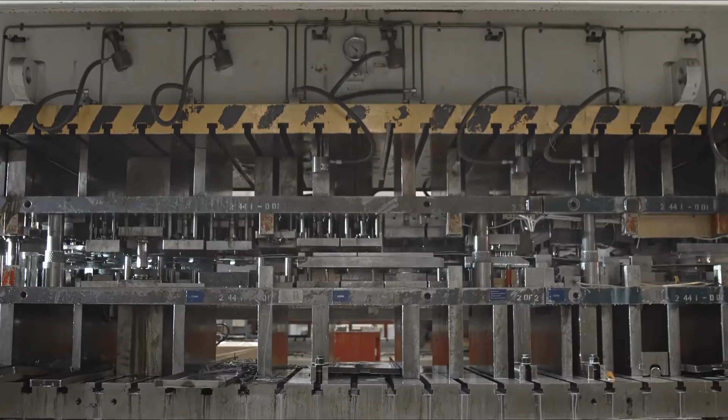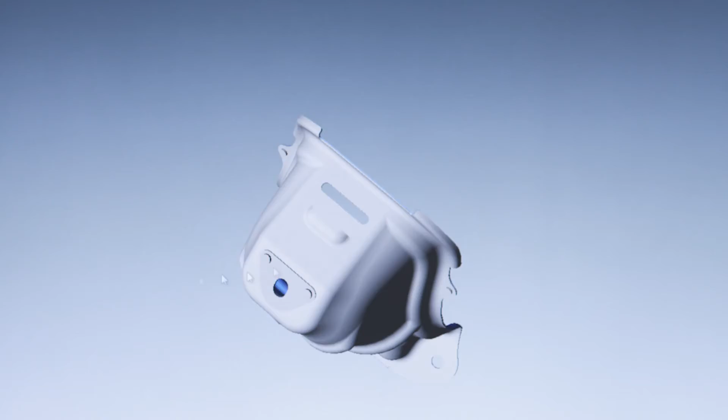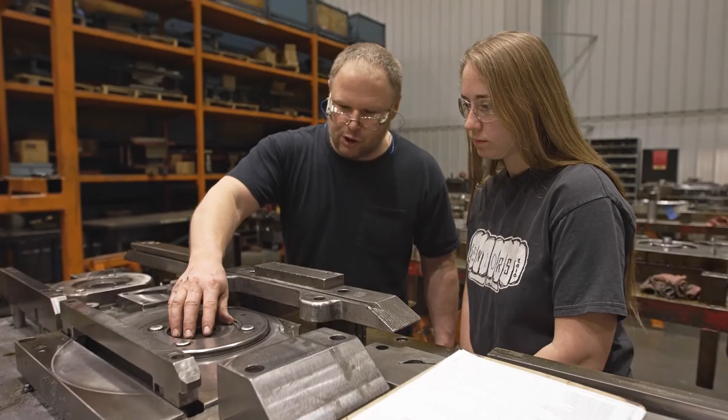For nearly 75 years, the Precision Metal Forming Association and its members have subscribed to the very highest standards of excellence. PMA's annual Awards of Excellence competition recognizes innovative metal forming companies for outstanding performance in design, product development, process control, productivity, innovation and technology, quality, safety, and training and education. Some have achieved the pinnacle of distinction, and we honor them now: the 2016 Awards of Excellence in Metal Forming winners.

Our first award is the metal forming industry's most prestigious honor for design and engineering excellence, the Higgins-Caditz Design Award. The award is presented to a manufacturing company that has demonstrated innovation, expertise, and unique product design. It was created in 1955 by the Worcester Pressed Steel Company of Worcester, Massachusetts, in memory of its founder, John Woodman Higgins, and former PMA chairman Carter C. Higgins. The award is sponsored by the Quarterly Club, a group of CEOs from leading metal forming companies, in memory of Quarterly Club founder and past PMA chairman Clem Caditz.

The 2016 winner of the Higgins-Caditz Design Award is Federal Tool and Engineering, West Bend, Wisconsin. Federal Tool and Engineering won the award for its redesign of the CB mounting bracket, used in securing heating cables to the exterior of commercial food service ovens.

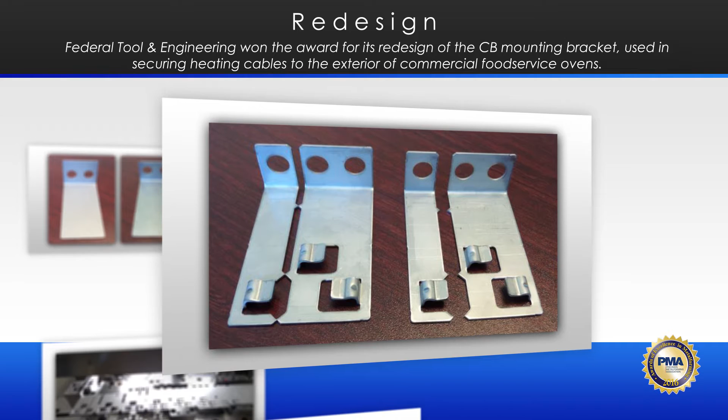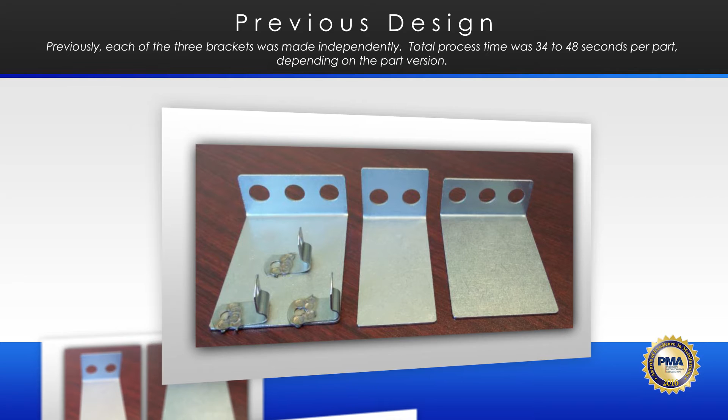Based on the size of the oven, either a single, double, or triple hole version of the mounting bracket is used to secure the heating cables. Previously, each of the 3 brackets was made independently. Total process time was 34 to 48 seconds per part, depending on the part version. This equated to a typical 2,000-piece run taking as long as 26 hours to process. On an annual volume of 45,000 pieces, the annual process time exceeded 550 hours. Additional concerns surrounded the storage, management, and procurement of 3 different product numbers, in addition to the tabs welded to each bracket.

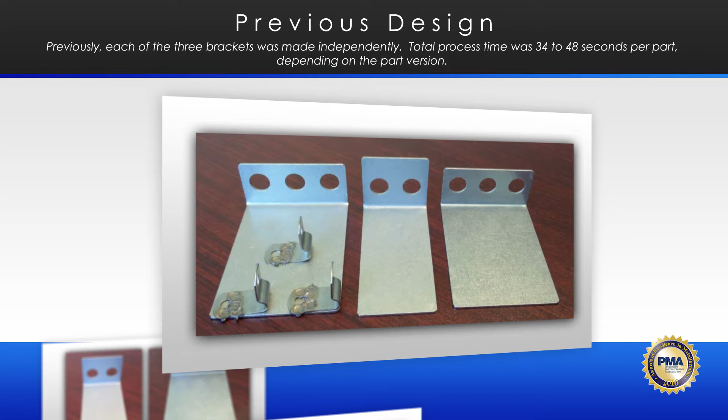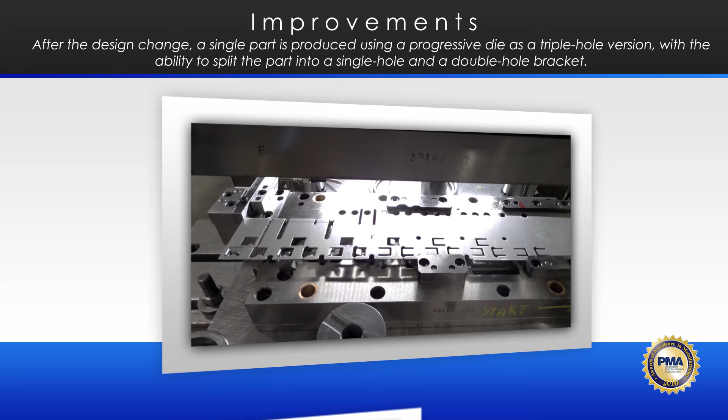After the design change, a single part is produced using a progressive die as a triple hole version, with the ability to split the part into a single hole and a double hole bracket. Total process time has been reduced to 5 to 6 seconds, depending on whether the triple hole version is split into a single or double hole. This equates to a typical 2,000-piece run taking about 4 hours to produce, resulting in an annual reduction in processing time of 460 hours. The original part was produced as a separate job with 2 work centers, 1 laser and 1 brake.

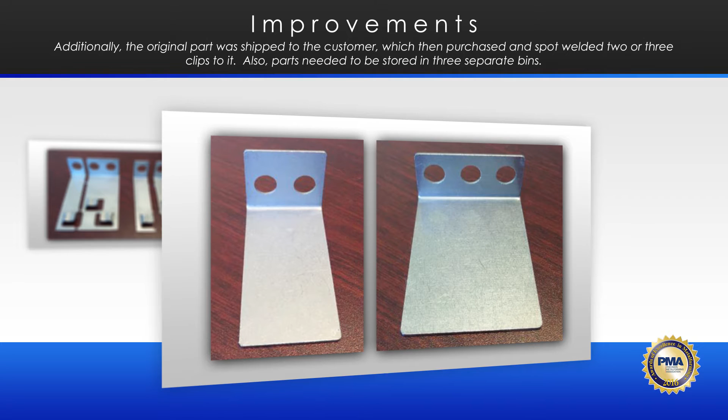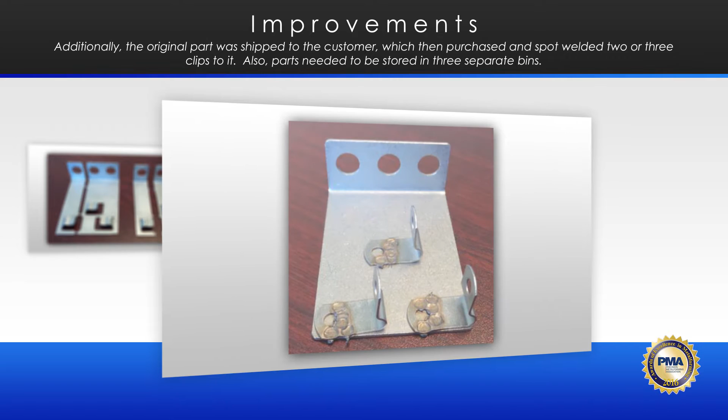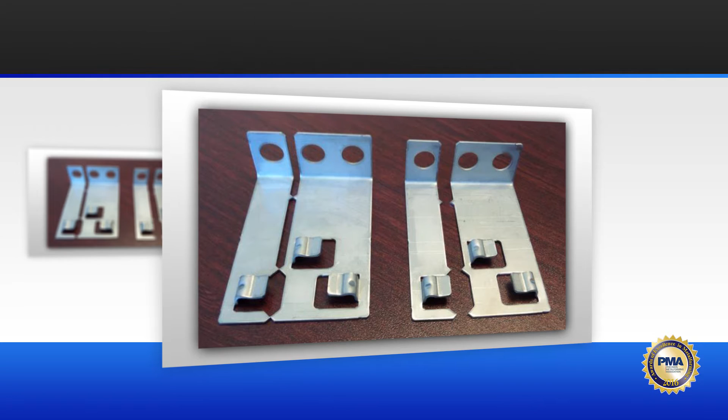With the new design, 3 press and post-press operations are eliminated. Additionally, the original part was shipped to the customer, which then purchased and spot welded 2 or 3 clips to it. Also, parts needed to be stored in 3 separate bins. Now, the customer is shipped 1 complete part that requires no further operations, and it can be stored as a single part number until separation is necessary. Congratulations, Federal Tool and Engineering, for your outstanding achievement.

The Pitcher Insurance Agency Safety Award, sponsored by Pitcher Insurance Agency, Palatine, Illinois, recognizes an effective and comprehensive safety program or a specific innovative idea in the context of an effective safety program. The 2016 winner of the Pitcher Insurance Agency Safety Award is E&E Manufacturing Company, Plymouth, Michigan.

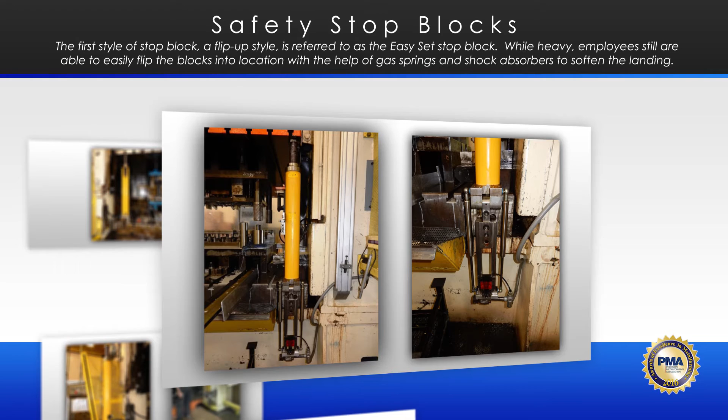E&E won the award for developing 2 types of safety stop blocks designed to eliminate the need to lift heavy stop blocks into the press, which can be hazardous. The first style of stop block, a flip-up style, is referred to as the Easy Set stop block. While heavy, employees still are able to easily flip the blocks into location with the help of gas springs and shock absorbers to soften the landing.

E&E also utilizes two safety switches on these blocks. These are automatically disengaged when the block is in the upright position. The Easy Set is equipped with Air Assist on the adjustable screw portion of the stop block.

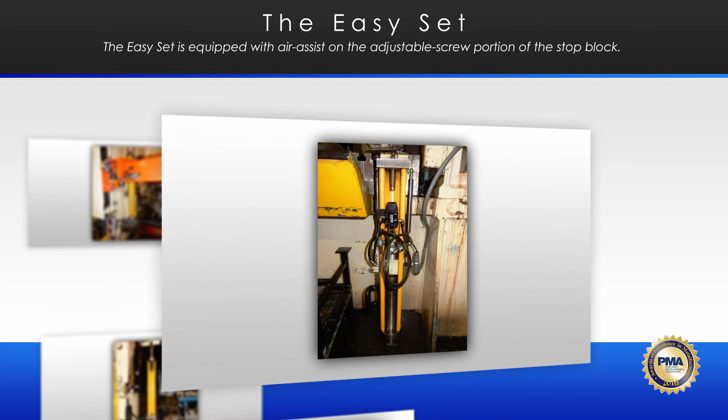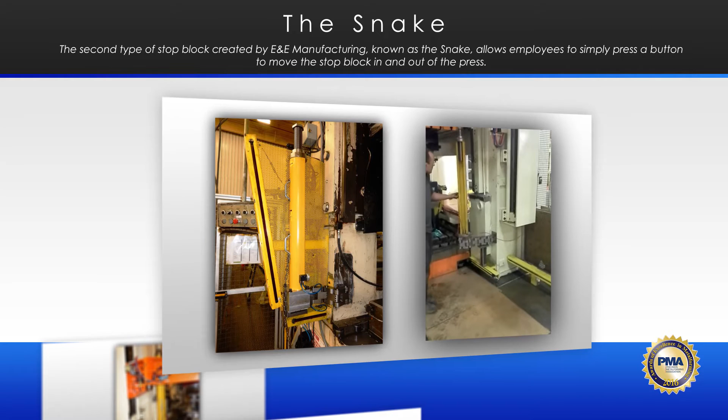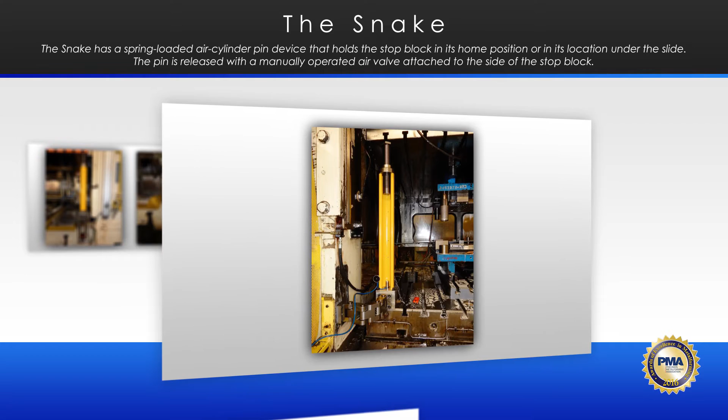The second type of stop block created by E&E Manufacturing, known as the Snake, allows employees to simply press a button to move the stop block in and out of the press. The Snake has a spring-loaded air cylinder pin device that holds the stop block in its home position or in its location under the slide. The pin is released with a manually operated air valve attached to the side of the stop block.

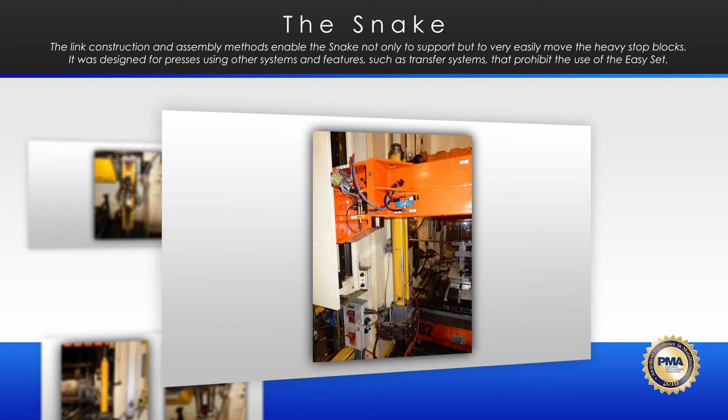The link construction and assembly methods enable the Snake not only to support, but to very easily move the heavy stop blocks. It was designed for presses using other systems and features, such as transfer systems, that prohibit the use of the Easy Set. Congratulations, E&E, on your outstanding safety efforts.

Our next award, the Zurich Manufacturing Corporation Productivity Award, is sponsored by Zurich Manufacturing Corporation, Mount Kisco, New York. It recognizes outstanding achievement in the development and implementation of programs and processes, and the use of assets that lead to significant improvements in productivity. The winner of the 2016 Zurich Manufacturing Corporation Productivity Award is Tella Tool and Manufacturing Company, Lombard, Illinois.

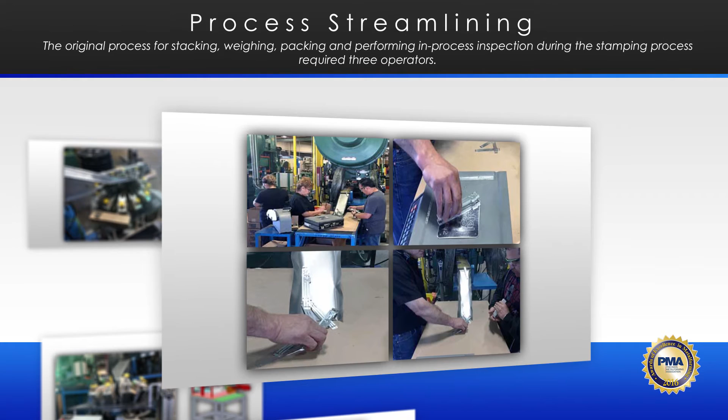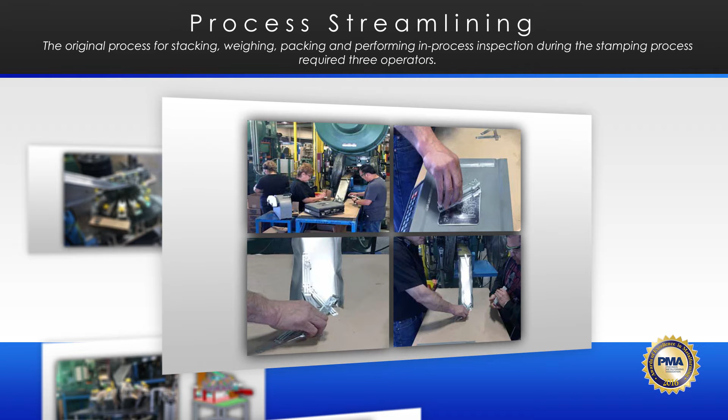The company won the award for streamlining the packaging process on one of its high-volume production tools that produces more than 3 million parts per year. The original process for stacking, weighing, packing, and performing in-process inspection during the stamping process required 3 operators. With the press running at 37 strokes per minute, parts would become tangled and twisted while sliding down the exit chute after exiting the production tool, leading to numerous press stoppages and significant downtime.

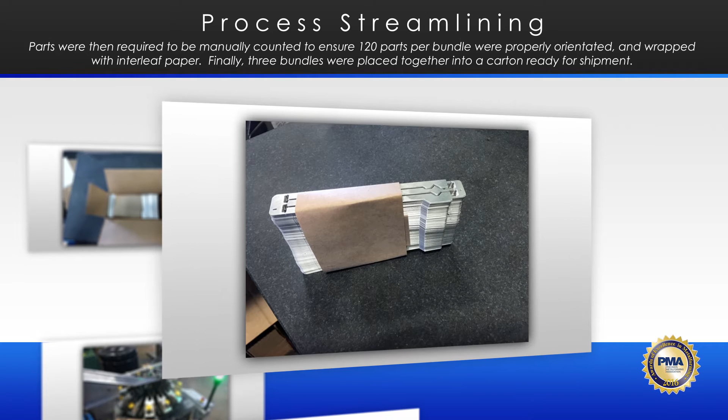Parts were then required to be manually counted to ensure 120 parts per bundle were properly orientated and wrapped with interleaf paper. Finally, 3 bundles were placed together in a carton ready for shipment.

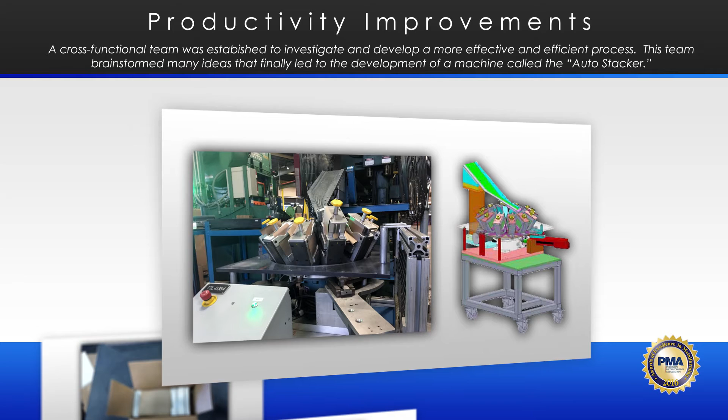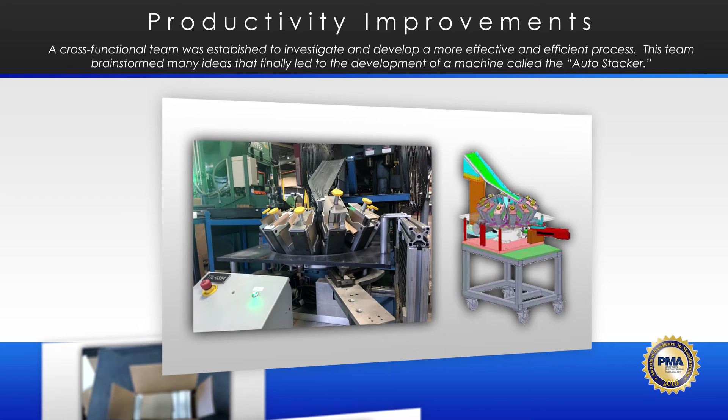A cross-functional team was established to investigate and develop a more effective and efficient process. This team brainstormed many ideas that finally led to the development of a machine called the Auto Stacker. This automated piece of equipment orientates, stacks, and counts parts as they exit the production tooling and travel down the conveyor. The Auto Stacker was completely designed and fabricated in-house by Tella Tool.

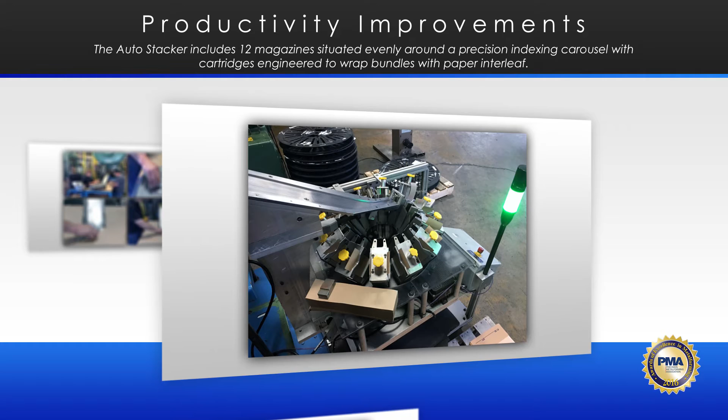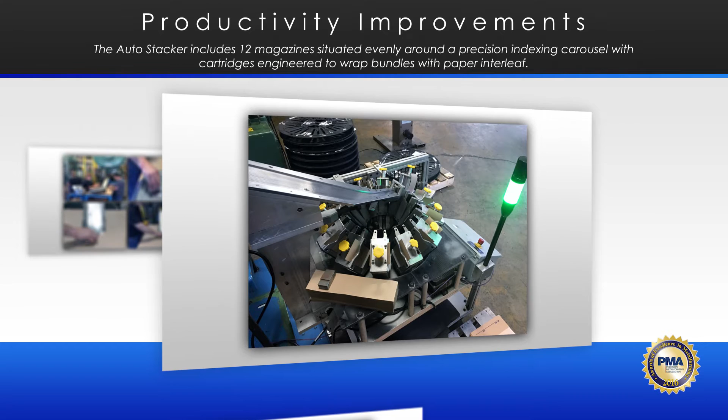The Auto Stacker includes 12 magazines situated evenly around a precision indexing carousel with cartridges engineered to wrap bundles with paper interleaf. PLCs and electronic sensors control automated indexing of magazines, timing of the servo motor, and the number of parts needed per bundle. This new process allows for a single operator to complete the entire stamping and packaging operation while effectively performing in-process inspection.

All of this while not having to stop the press. It completely eliminates the need to manually stack, weigh, and count the parts coming off of the press.

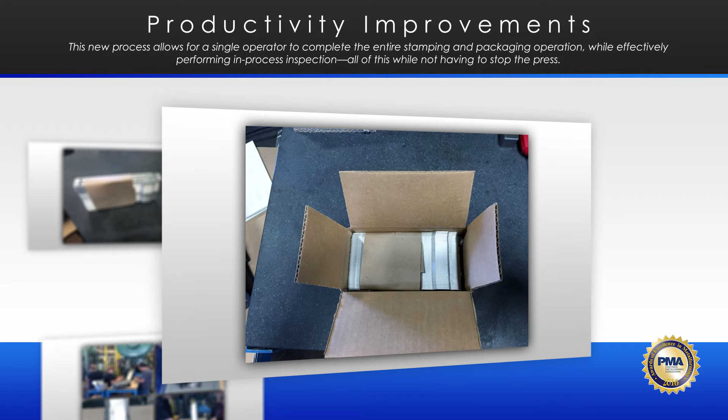With the development and implementation of the Auto Stacker, Tella Tool has achieved many productivity improvements. Press speed was increased by 48%, resulting in an additional 624 available press hours per year. Also, 2 operators were redeployed to other areas within Tella Tool.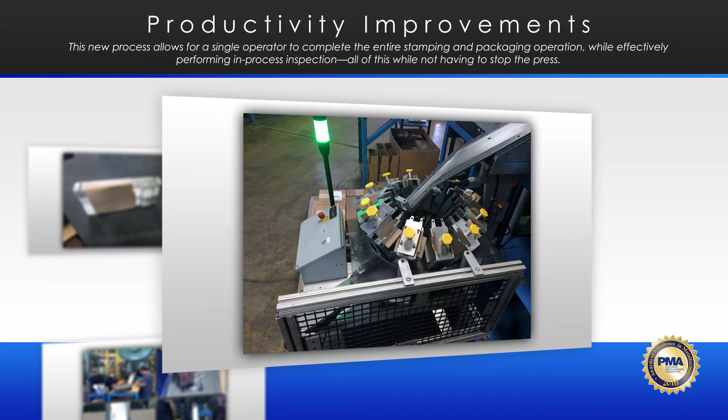As a result of the increased efficiencies and labor redeployment, a total savings of approximately $114,000 per year was realized. Congratulations, Tella Tool and Manufacturing, on your remarkable achievement.

The Ulbrich Award for Competitive Excellence in Product Development is sponsored by Ulbrich Stainless Steels and Special Metals, North Haven, Connecticut. The award recognizes a metal forming company that develops and manufactures a product that best utilizes metal in place of a competitive material, or that develops a product using flat-rolled material at a significant cost reduction to customers on a product that was previously manufactured using more costly manufacturing processes such as machining, tubing, metal injection molding, or casting.

The winner of the 2016 Ulbrich Award for Competitive Excellence in Product Development is Pentaflex, Springfield, Ohio. Pentaflex won the award for developing and processing a stamped brake spider for use in Class 8 trucks.

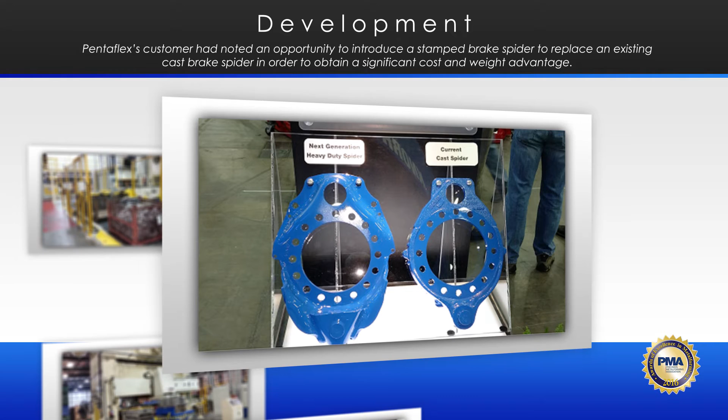Pentaflex's customer had noted an opportunity to introduce a stamped brake spider to replace an existing cast brake spider in order to obtain a significant cost and weight advantage. Because the braking loads seen in this particular application are in excess of 26,000 pounds, brake spiders routinely have been manufactured as castings. Pentaflex was integrally involved in supporting the development effort via its manufacturing capabilities in forming, welding, machining, and assembling.

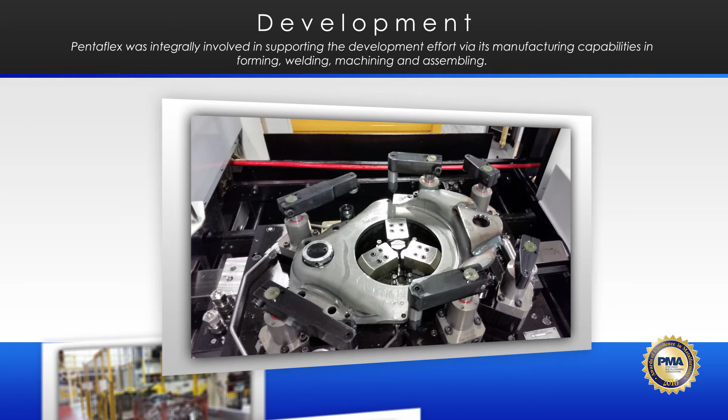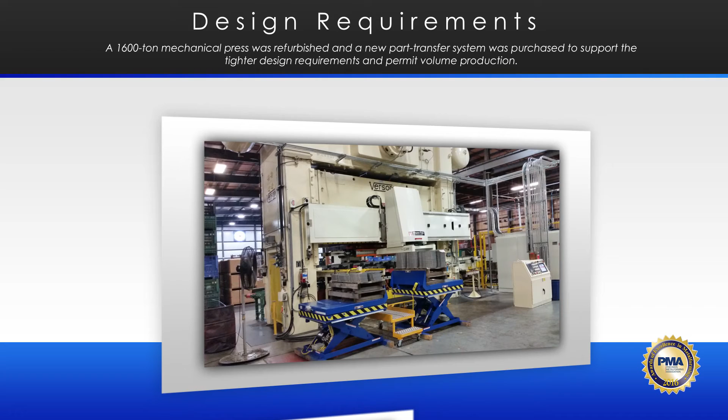As developed, the stamped, high-strength, low-alloy steel spider delivered improved stiffness, strength, and durability while being more difficult to form. A 1,600-ton mechanical press was refurbished, and a new part transfer system was purchased to support the tighter design requirements and permit volume production.

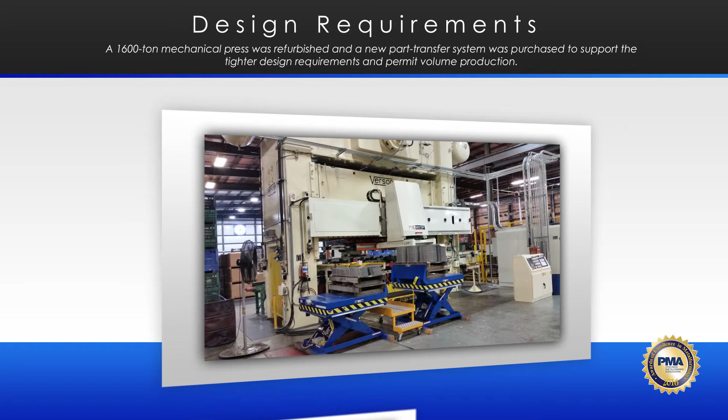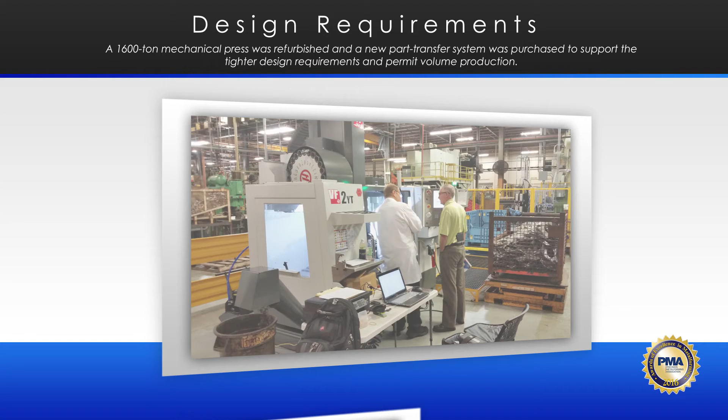Additionally, the assembly process required new gas metal arc welding equipment for welding the strap to the spider form, and the design specifications for reduced machine tolerances required a new CNC machine. A second existing press was then tooled for stamping the wheel attachment hole pattern into the spider.

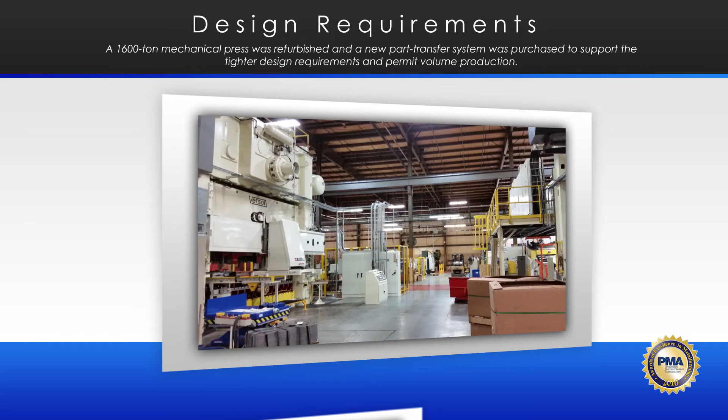From release of the first prototypes to the program's launch in the summer of 2015, Pentaflex has undertaken a continuous product development effort. Production to date has totaled more than 100,000 spiders and now includes more than 80 spider variations for different OEM customers.

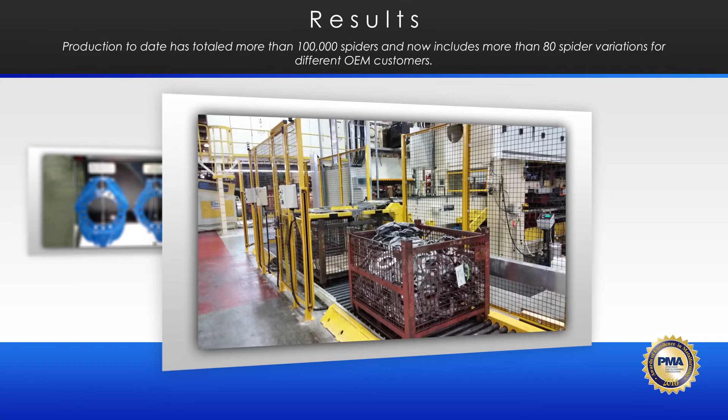The cost and weight savings achieved with the development of the stamped spider over the cast spider were significant. Cost savings total nearly $2 per part depending on the spider, and the final stamped spider assembly and production results in weight savings of 3 to 6 pounds per vehicle based on customer analysis. Congratulations, Pentaflex, on a job well done.

Our next award, the Plex Systems Innovation and Technology Award, is sponsored by Plex Systems, Troy, Michigan. New in 2016, this award recognizes a metal forming company that has implemented cloud technology to drive innovation from a product or business perspective, or transform business operations.

The winner of the 2016 Plex Systems Innovation and Technology Award is HK Metalcraft, Lodi, New Jersey. HK Metalcraft won the award for implementing cloud technology that improved company-wide information sharing and internal communications, gained more information through data with built-in quality checks and live statistical process control, or SPC, and improved operations with more accurate process controls.

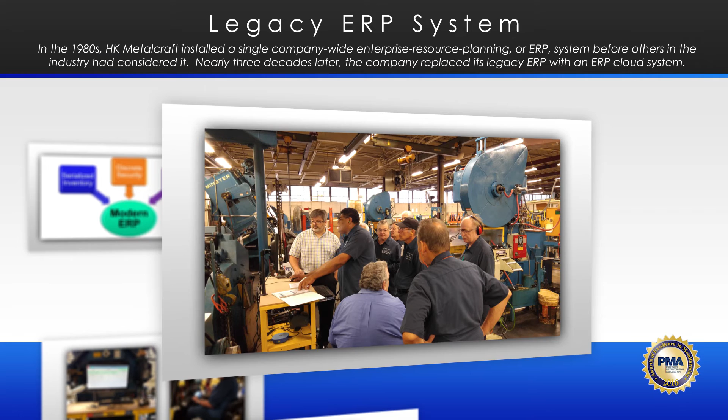In the 1980s, HK Metalcraft installed a single company-wide Enterprise Resource Planning, or ERP, system before others in the industry had considered it. Nearly 3 decades later, the company replaced its legacy ERP with an ERP Cloud System.

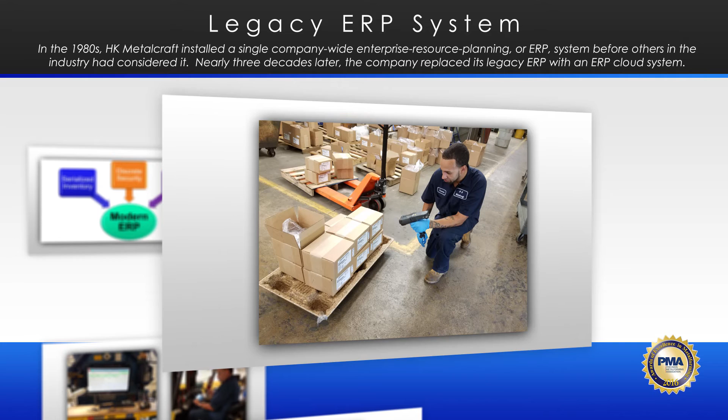Now, HK Metalcraft has serialized container-level inventory, making lot control much more accurate. It also has less finished inventory, less work in process, and more detailed process routings. Additionally, HK Metalcraft collects data from its plant floor and checks SPC on every product dimension to ensure accuracy.

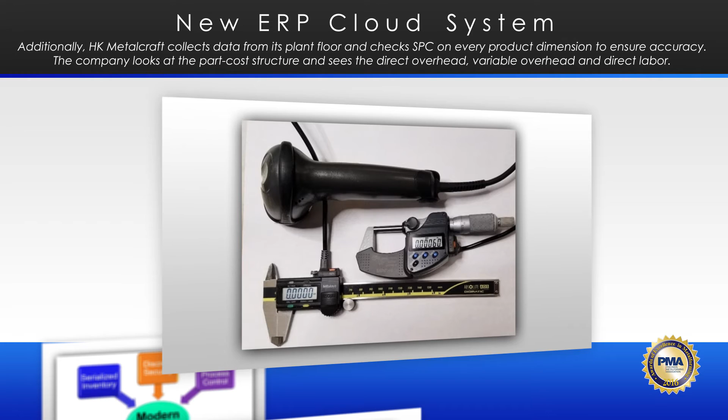The company looks at the part cost structure and sees the direct overhead, variable overhead, and direct labor. As process routings and rates are tweaked, HK Metalcraft looks at part cost structures to find areas of profit or loss. All of this is enabled by the cloud-based ERP systems.

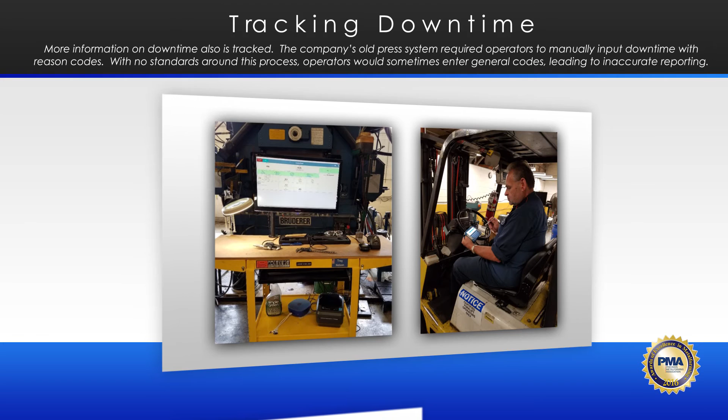More information on downtime also is tracked. The company's old press system required operators to manually input downtime with reason codes. With no standards around this process, operators would sometimes enter general codes, leading to inaccurate reporting. In implementing the ERP Cloud System, HK Metalcraft now knows what causes the downtime and has an audit trail to pinpoint a better solution.

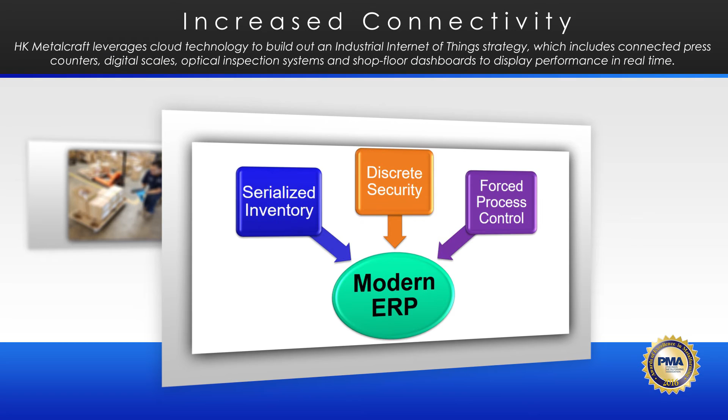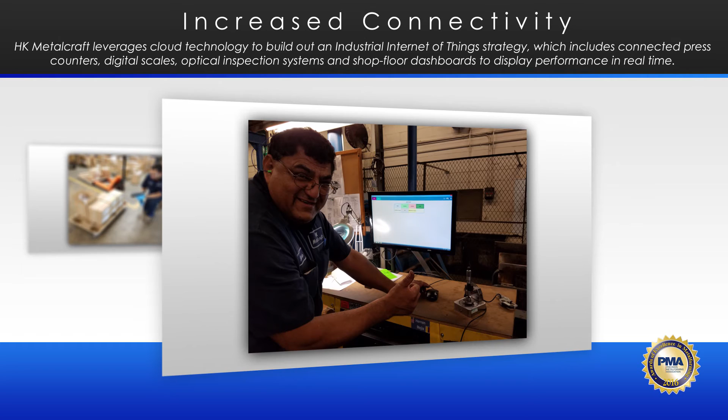HK Metalcraft continues leveraging cloud technology to build out an industrial Internet of Things strategy, which includes connected press counters, digital scales, optical inspection systems, and shop floor dashboards to display performance in real time. Congratulations, HK Metalcraft, for transforming your business operations through cloud technology.

The A.R. Hedberg Training and Education Award is sponsored by HPL Stampings, Lake Zurich, Illinois. It recognizes a company for notable efforts to technically train and educate employees by instituting a total training program throughout the company. The winner of the 2016 A.R. Hedberg Training and Education Award is Dewys Manufacturing, Marne, Michigan.

Dewys Manufacturing won the award for its Dewys University, developed to meet the company's growing human resources requirements. Dewys University welcomed its first students in January 2012 by offering a progressive welding class. The university has since expanded its curriculum and offers training in key technological positions such as welding, press brakes, machining, and powder coating applications. These programs offer Dewys Manufacturing a strong pool of trained and motivated team members with skills that are in high demand.

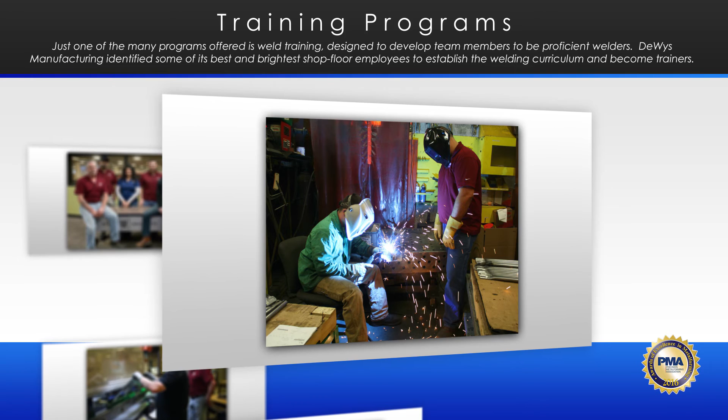Just one of the many programs offered is weld training, designed to develop team members to be proficient welders. DeWys Manufacturing identified some of its best and brightest shop floor employees to establish the welding curriculum and become trainers. Each of the DeWys University training programs can accommodate 1 or 2 trainees per session. The weld training program typically has 2 students who spend 6 weeks working hands-on with the trainer. During this time, the trainer evaluates technique, commitment to the company, and overall capabilities.

After the first 6 weeks, trainees move to predetermined shifts and departments. At that time, they are paired with mentors to help as needed. The overall process to make a new trainee an efficient welder is approximately 6 months. DeWys University works to consistently place new trainees in the pipeline based on open positions.

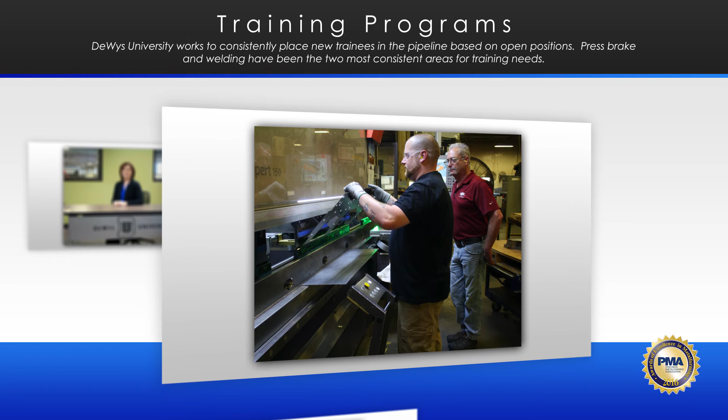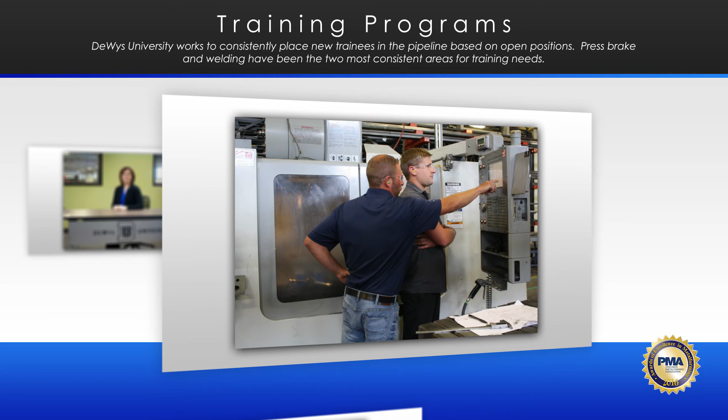Press brake and welding have been the 2 most consistent areas for training needs. To enter these programs, trainees undergo multiple interviews as well as skills tests or mechanical reasoning tests. The university is meant for new and current team members. Each program has 5 or 6 levels that vary based on skills, abilities, and years of service. The creation of the in-house training program has resulted in an increase of team members, wages, and overall morale at DeWys Manufacturing, in addition to providing the company with its needed skilled labor.

Congratulations, DeWys Manufacturing, for your outstanding efforts to train industry employees.

The Clips and Clamps Industries Educational Institution Award is sponsored by Clips and Clamps Industries, Plymouth, Michigan. It recognizes a public or private educational institution that provides exemplary training and education services to companies in the metal forming industry. The winner of the 2016 Clips and Clamps Industries Educational Institution Award is Middle Tennessee State University, Murfreesboro, Tennessee. The school won the award for its Experimental Vehicles program, which provides extensive hands-on experiences gained by creating and assembling vehicles to compete in collegiate competitions.

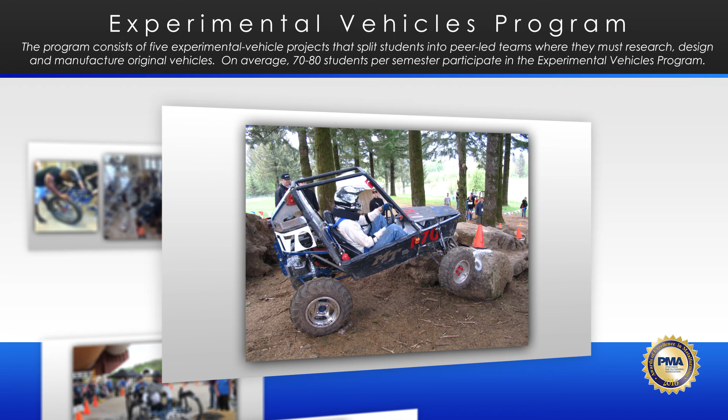The program consists of 5 experimental vehicle projects that split students into peer-led teams, where they must research, design, and manufacture original vehicles. On average, 70 to 80 students per semester participate in the experimental vehicles program. Students are able to utilize the skills they gain from the program, including problem solving, innovation, and resourcefulness in the metal forming industry. Students also learn valuable job functions such as tensile forming, bending, and shearing, which are utilized to manufacture and develop the experimental vehicles.

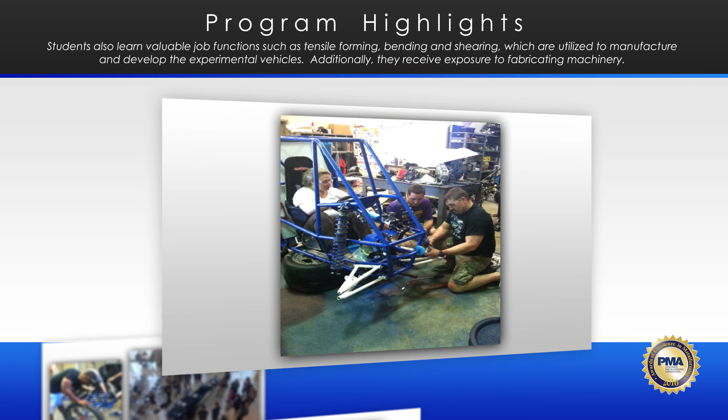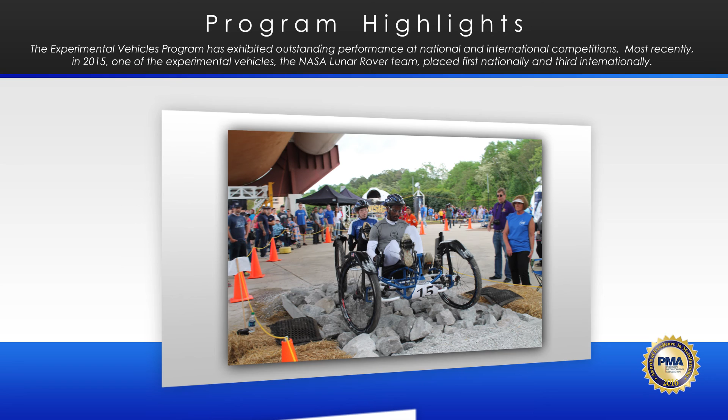Additionally, they receive exposure to fabricating machinery. The program also gives students practice in presenting their design reports and technical work, allowing them not only to learn technical skills but also communication skills. Middle Tennessee State University's Experimental Vehicles program has exhibited outstanding performance at national and international competitions. Most recently, in 2015, one of the experimental vehicles, the NASA Lunar Rover team, placed first nationally and third internationally.

This team also was honored with the Safety Award and the Neil Armstrong Outstanding Design Award. Because of the Experimental Vehicles program, metal forming industry recruiters are more eager to hire these new engineers, as they require less training, are more knowledgeable, and can utilize problem-solving skills learned in the program. The program has been extremely successful, with more than 90% of students having a job lined up in the metal forming industry after graduation.

Congratulations, Middle Tennessee State University. PMA applauds your efforts to prepare students for careers in manufacturing.

PMA also offers awards in the areas of quality and process control. The Link Systems Process Control Award, sponsored by Link Systems in Nashville, Tennessee, promotes the application of electronic analog closed-loop process controls in the metal forming process by recognizing innovative electronic solutions implemented by a North American manufacturing company, which have resulted in significant quality, cost reduction, and productivity improvements.